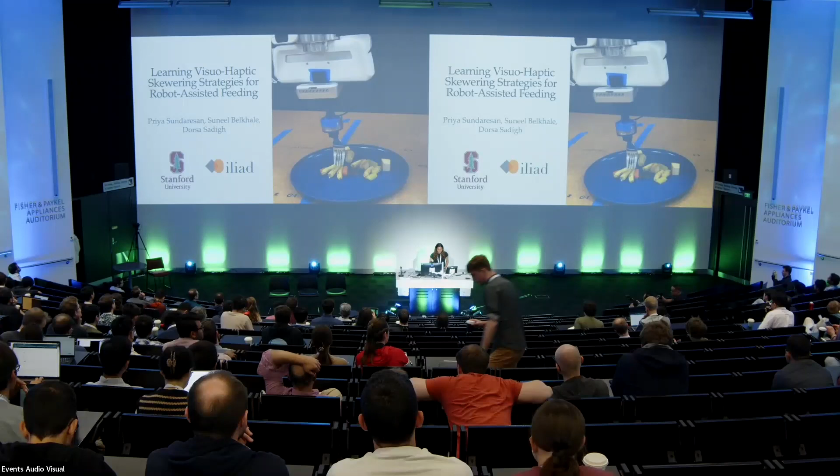Today I'm going to be presenting our work on learning manipulation policies for robot-assisted feeding, in particular, learning skewering strategies from multimodal perception.

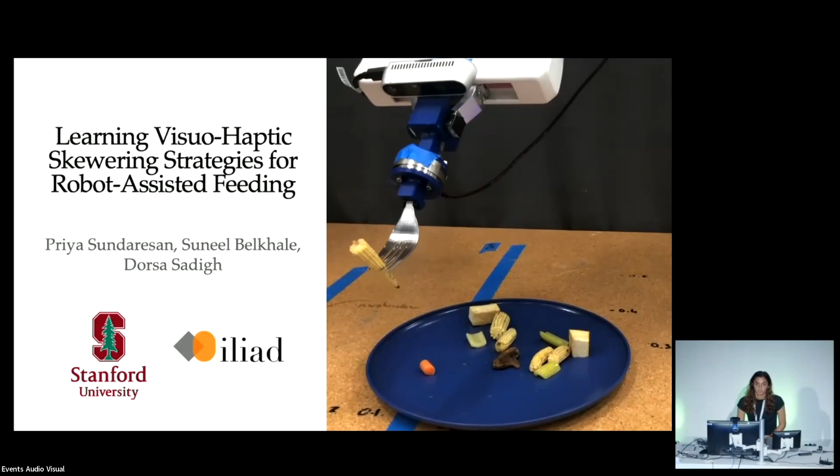Robot-assisted feeding has the potential to improve quality of life for millions of people, including those with upper mobility impairments who lack the ability to feed themselves, as well as a substantial portion of hospitalized elderly, nursing home, and stroke patients, as well as the caregivers who look after them. More broadly, anyone impacted by the substantial time and effort required in meal preparation and feeding, such as families with young children and elderly.

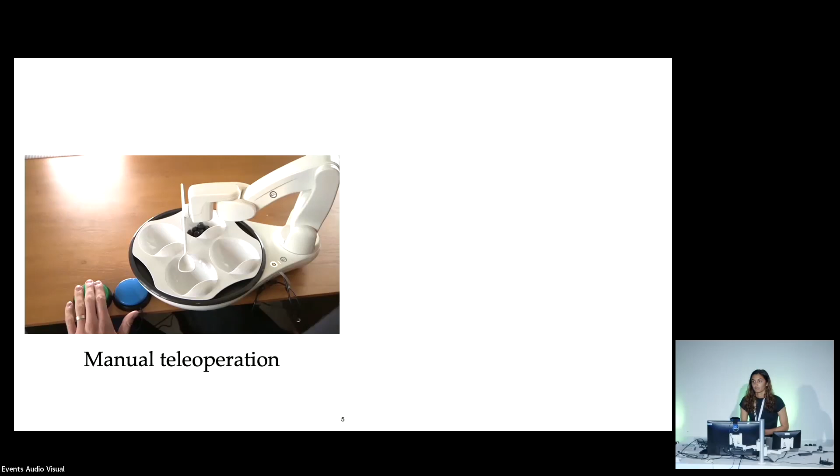There are a number of solutions on the market for automating meal assistance, but one drawback is that they often require the user to perform some degree of manual teleoperation when it comes to performing the low-level movements of picking up food items. Another limitation is that they require an operator to have pre-programmed trajectories for transfer to a user's mouth. So this leaves great potential for automation in the space of bite acquisition.

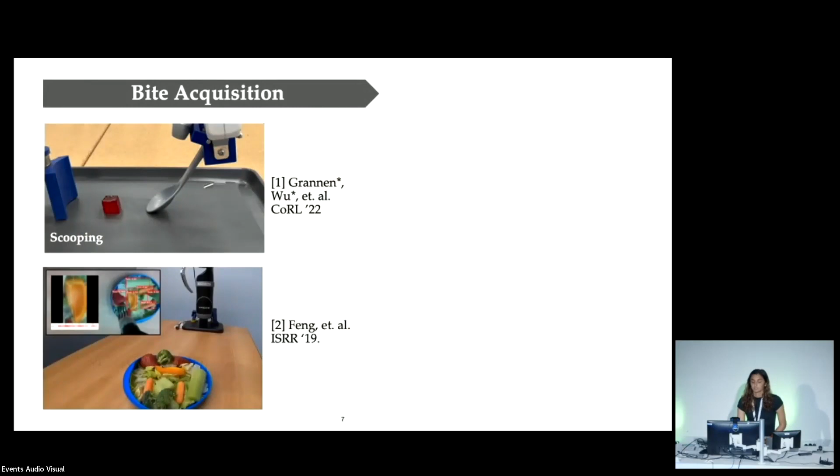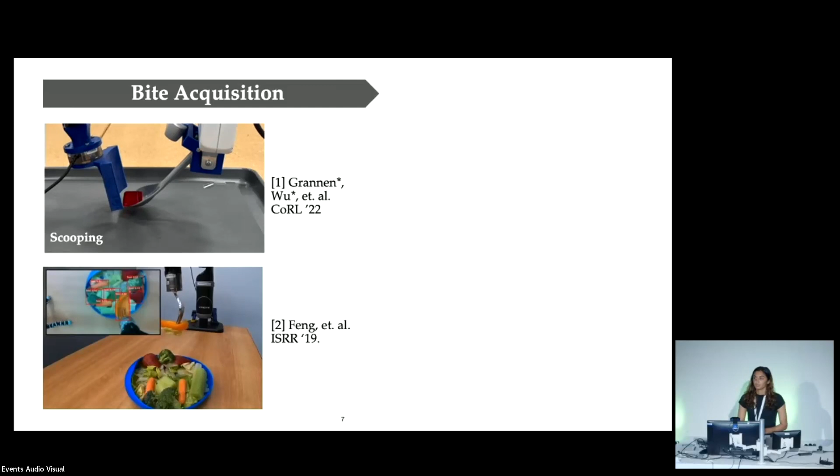You might have seen my lab mate Jen's work earlier at CoRL on learning bimanual scooping policies. A number of labs have also looked into automating skewering, which we build upon. The downstream goal of bite acquisition is eventually to do bite transfer, which is transferring a bite to a user's mouth in a way that's both comfortable and efficient.

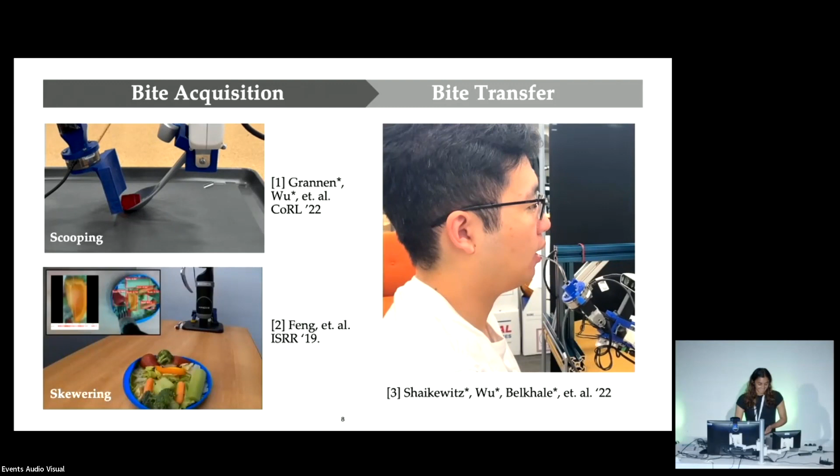The focus of this work will largely be on improving skewering strategies, as this still poses a number of challenges to robots today. So you might be wondering, what makes skewering difficult? This is a very challenging task, not just for robots, but even for humans, as you can see in this video of a baby trying to pick up mango slices with a fork.

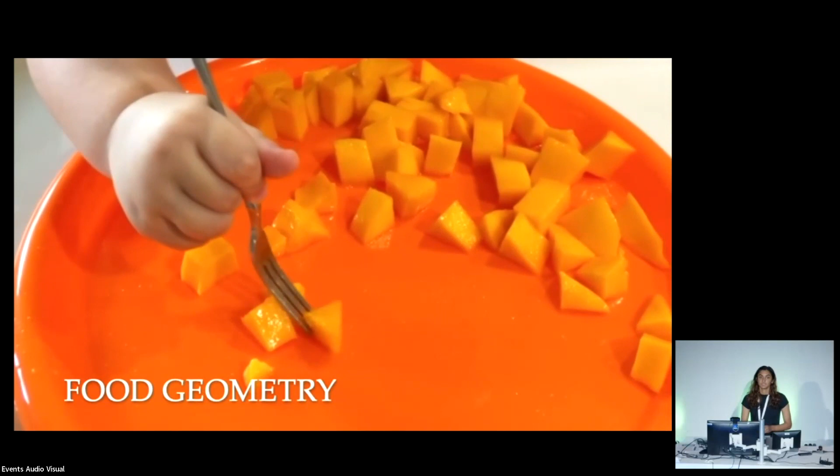More concretely, the first main challenge is that food comes in many different shapes, sizes, and scales, and we want our policy to be able to generalize across food geometries, because any slight misalignments of the fork tines with respect to the item pose can lead to slip failures, as you saw there.

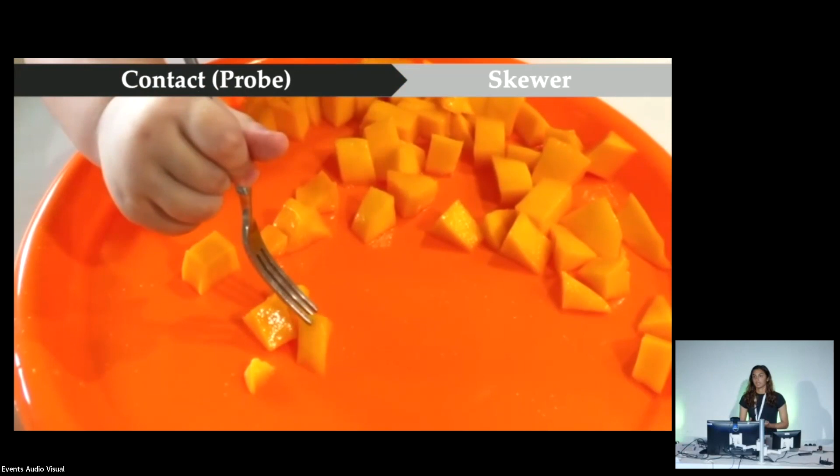We also want to avoid taking unnecessary attempts, so we want our policy to incorporate tool reactivity. As humans, something we do is when we play with our food, we can gauge important properties, like how ripe a mango slice is. But downstream skewering, given this information, is still very challenging.

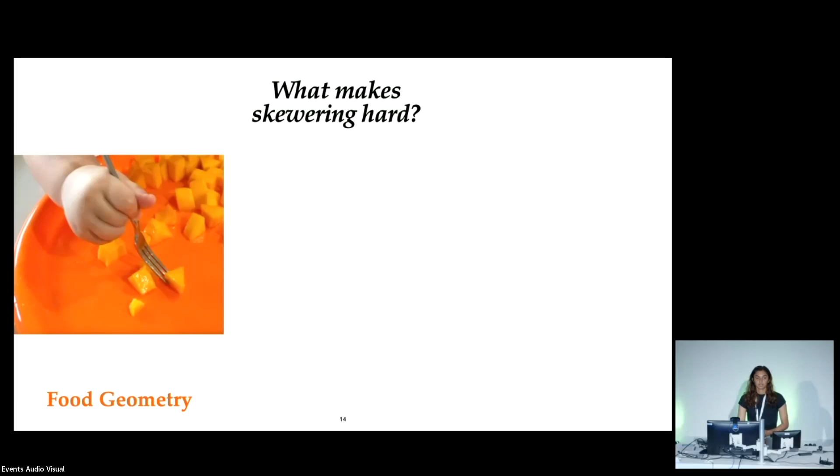Lastly, food is a highly deformable object, and we want our policy to take care when actually skewering so as to avoid the kind of smushing which you saw there. So in summary, the main challenges we're trying to address are coming up with a policy that generalizes across foods of different geometries, is also tool reactive, and is sensitive to the range of deformation behaviors that food can exhibit.

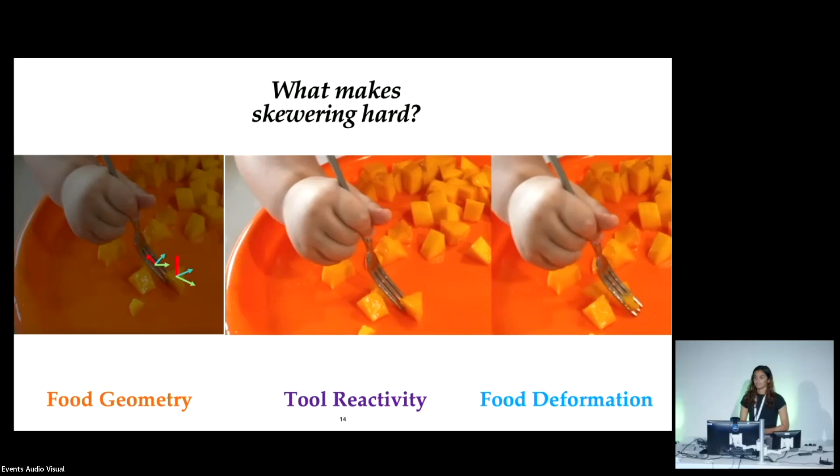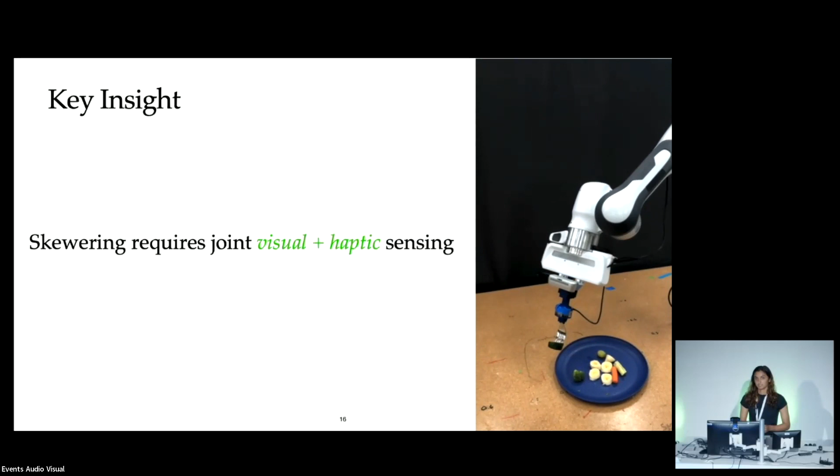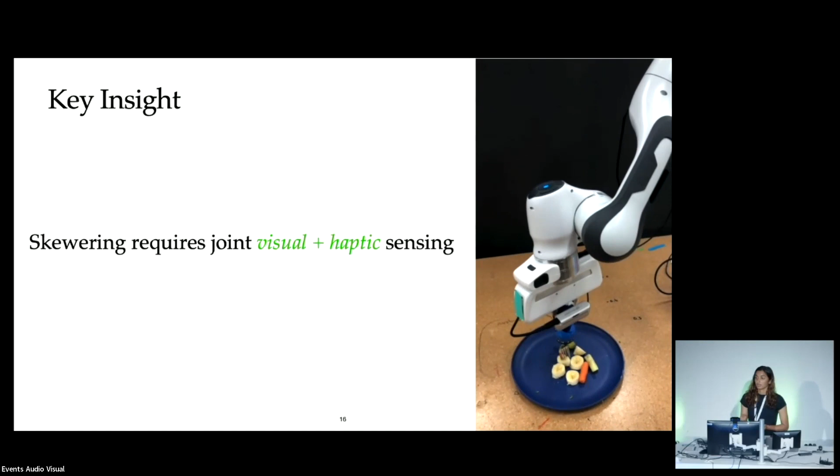Our key insight is that this task requires both joint visual and haptic sensing to enable reactive and zero-shot skewering. We achieve this with a novel probe-then-skewer approach, in which the multimodal feedback that we obtain upon just making contact with food items can inform the rest of the skewering trajectory on the fly.

So in this talk, I'm first going to formalize the skewering problem and then discuss our proposed approach, which we call haptic visual net, and finally demonstrate our system's performance on clearing various plates of food.

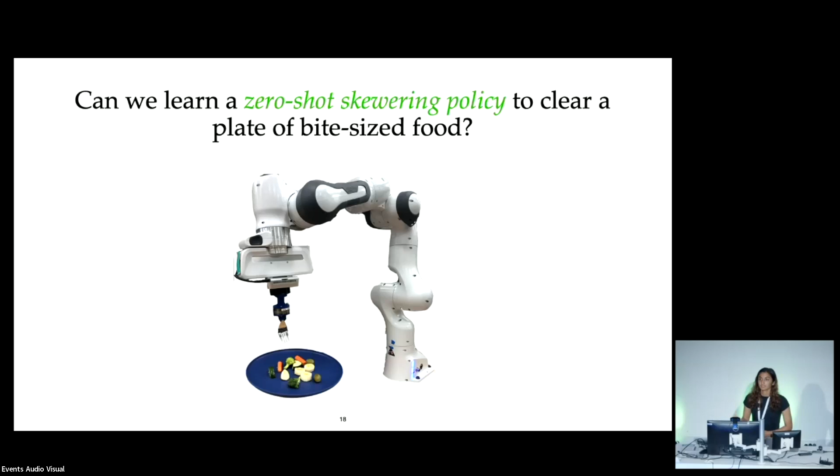We seek to learn a zero-shot skewering policy, enabling a robot with a fork-equipped end effector to be able to clear a plate of bite-sized food items.

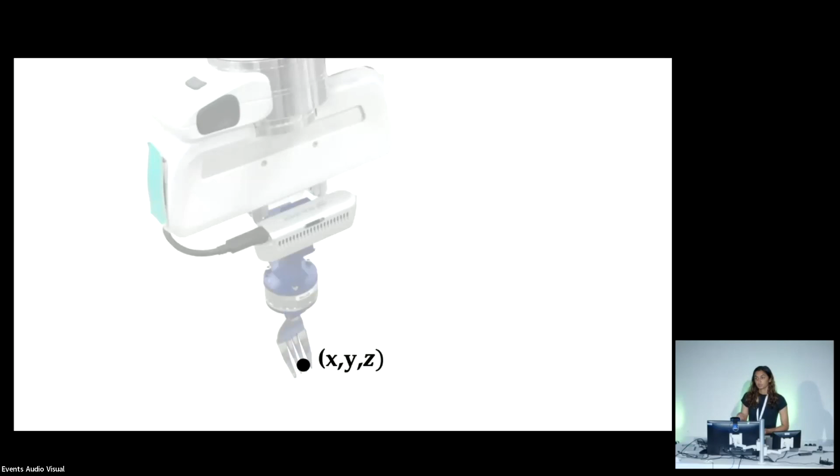For action space, we modulate the fork pitch for sensitivity to item deformation, as well as the fork roll for sensitivity to the item geometry. Within this action space, we can define a skewering action such that the fork starts at position XYZ, skewers downward an amount delta Z, while optionally tilting this amount delta beta. We'll see how we use this action space to instantiate skewering primitives later on.

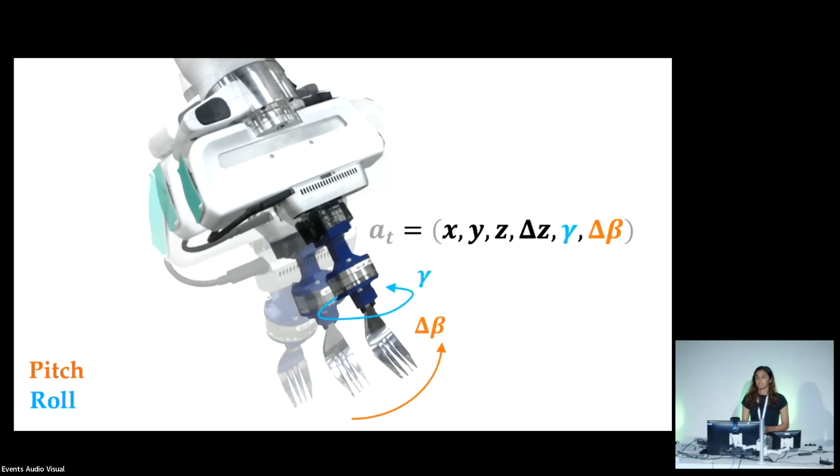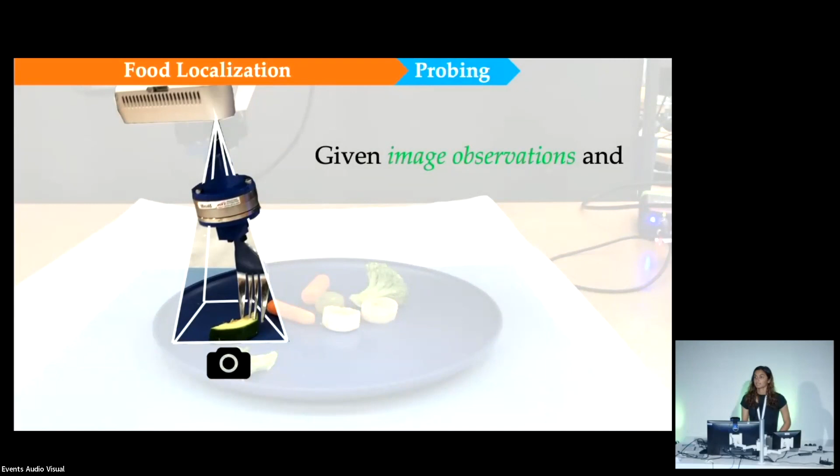Given this action space, what we do is we first probe food items, and given the post-contact image observations and haptic readings recorded over the first few milliseconds of contact, we want to learn a skewering policy pi, which can output a skewering action, as you can see here.

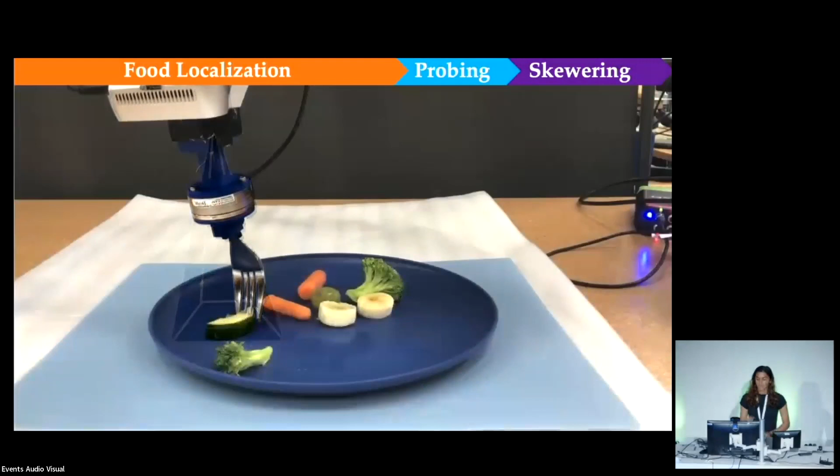Next, I'll be discussing how we actually learn such a policy with our approach, which is called haptic visual net.

Before going into the full method, I'm first just going to introduce the skewering primitives which we consider. On the left is the vertical skewering primitive, where the fork simply stabs an item in a straight and vertical motion. This is intended for very hard items like a broccoli stem, for example.

We also use an angled skewering primitive, where the fork gradually tilts while inserting into an item. This is to support soft and delicate things like a banana slice while lifting, to avoid any kind of slip.

With the multimodal feedback that we obtain upon probing, this serves as input to our haptic visual net, which aims to learn a multimodal food item representation encoding which skewering strategy is appropriate for the given food item. We first encode the force features separately using an LSTM, and the image observations using a visual encoder. Finally, the concatenated cross-modality embeddings from both vision and haptics serve as input to a final layer.

This layer classifies which primitive to execute: either angled skewering in the case of soft food items like the banana slice, as you can see on the upper right, or vertical skewering for hard items like broccoli.

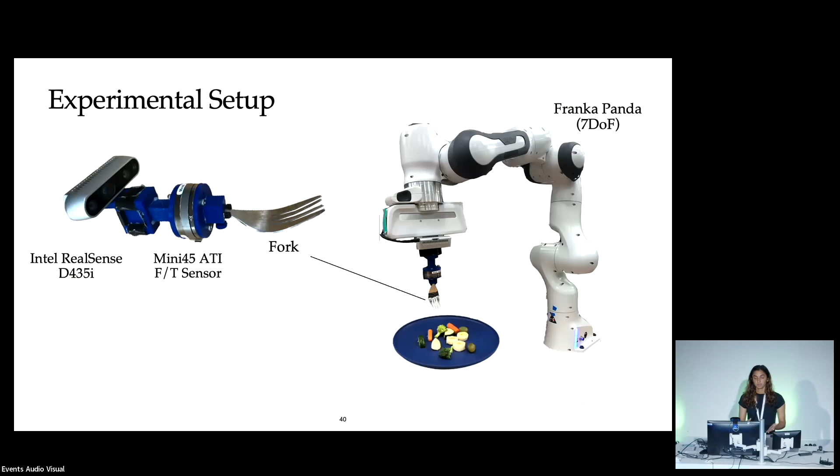We evaluate with a Franka robot equipped with a custom end effector mount consisting of a camera, a force torque sensor, and also a fork. We evaluate on both seen and unseen plates of varying levels of acquisition difficulty.

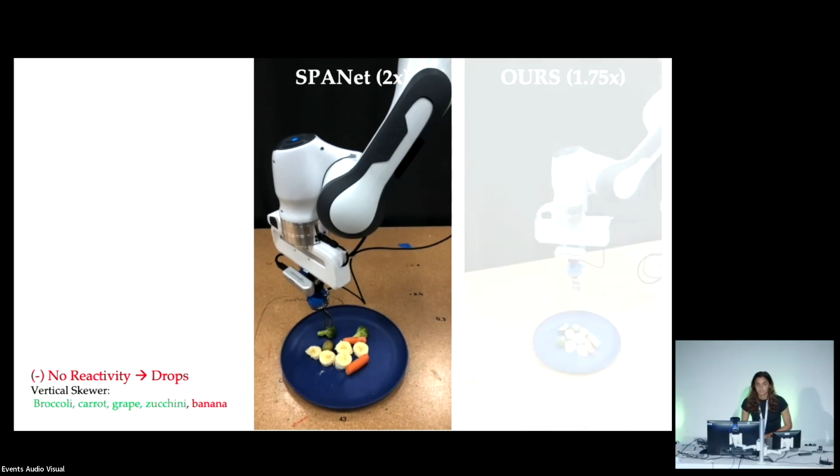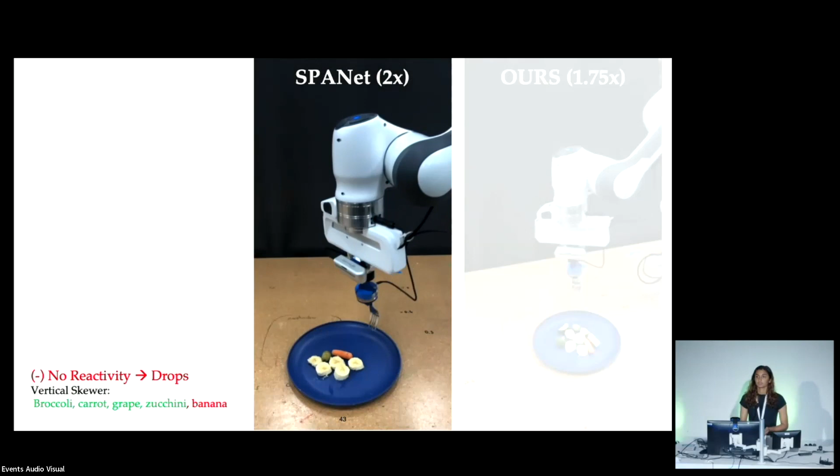Let's first take a look at this plate of fruits and vegetables. On the left is a video of a baseline called SPANet, from prior work, which is a visual-only baseline that does not use probing. As you can see, it tends to favor these vertical strategies overall, and while that's appropriate for the broccoli, it quickly leads to consecutive failures on banana slices as it's not able to adapt via probing.

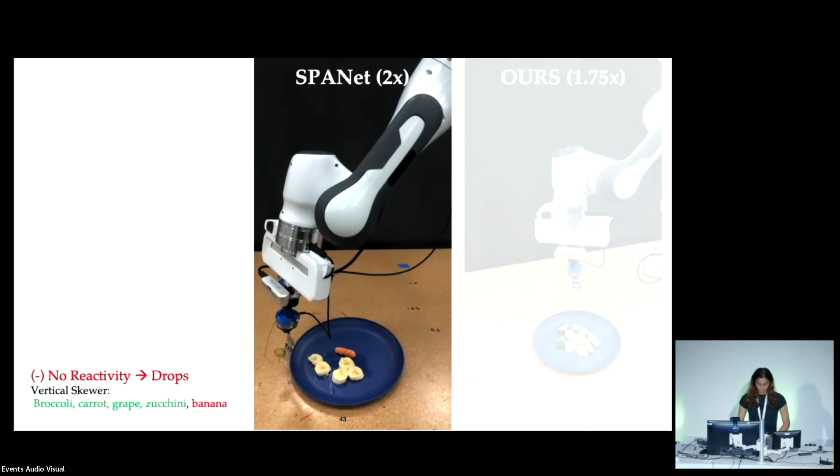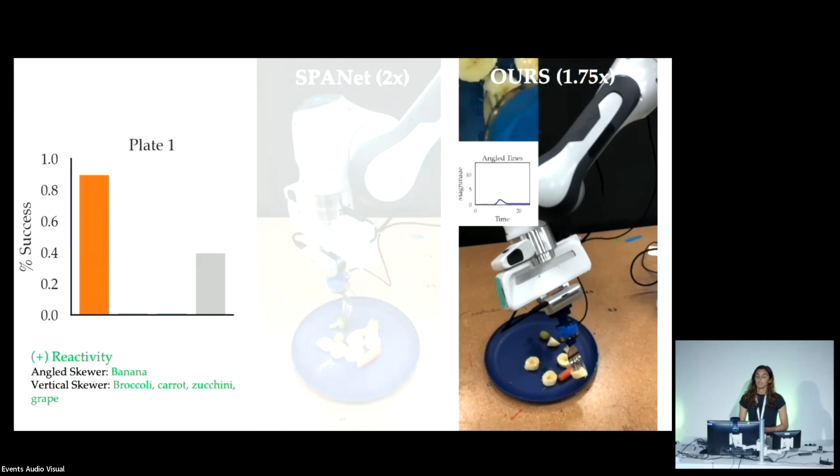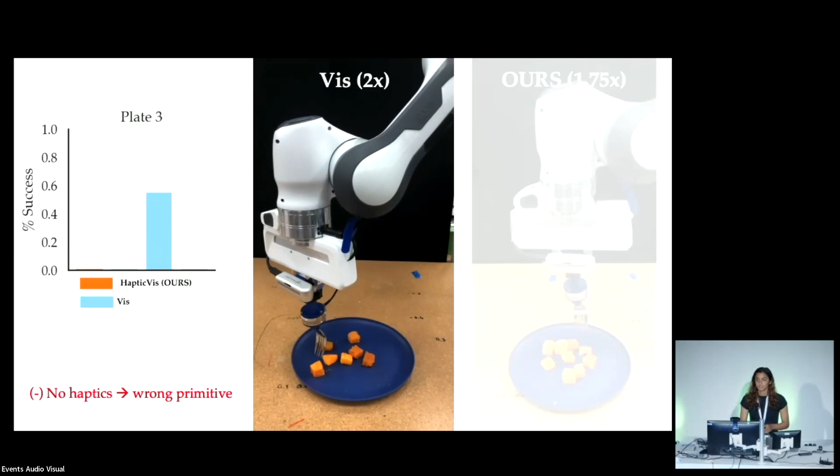This is a tricky plate because it's actually butternut squash with various degrees of cookedness, ranging from raw to half-boiled to fully boiled. On the left is a video of a visual-only baseline with no access to haptic info, and you can see that it's easily fooled by the different types of butternut squash because they are visually similar but texturally dissimilar.

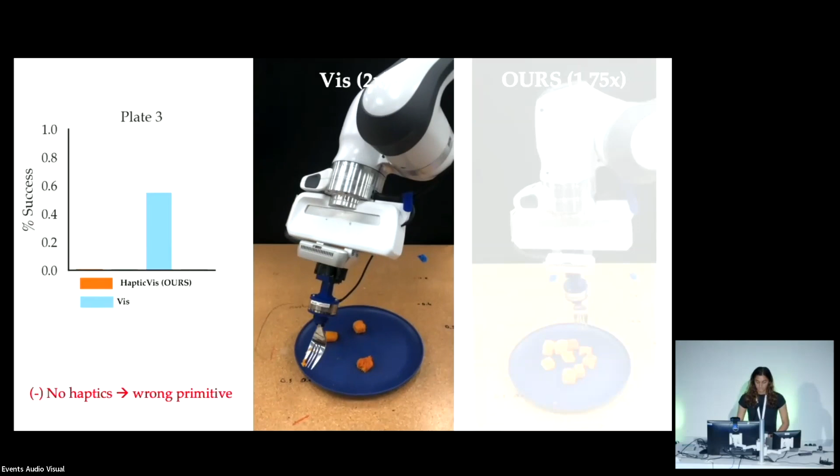Whereas our approach, by exploiting both vision and haptics, is able to infer that for the raw butternut squash, vertical skewering is appropriate, and with the more boiled variations, the angled skewering approach is appropriate, leading to far less drops and breakage.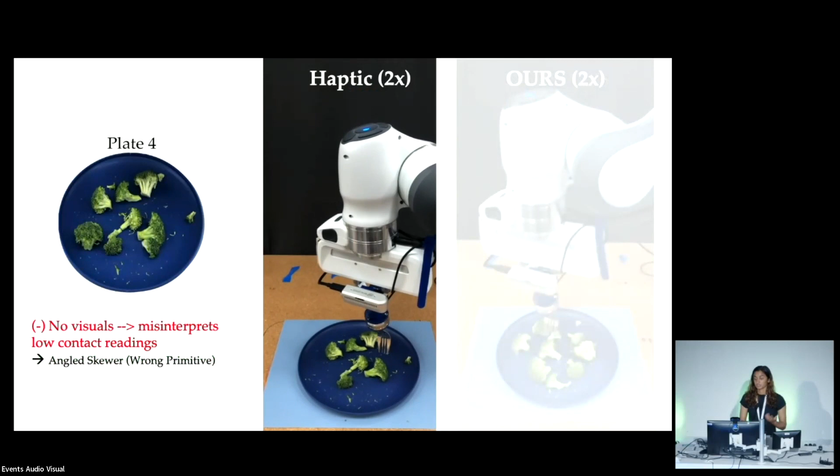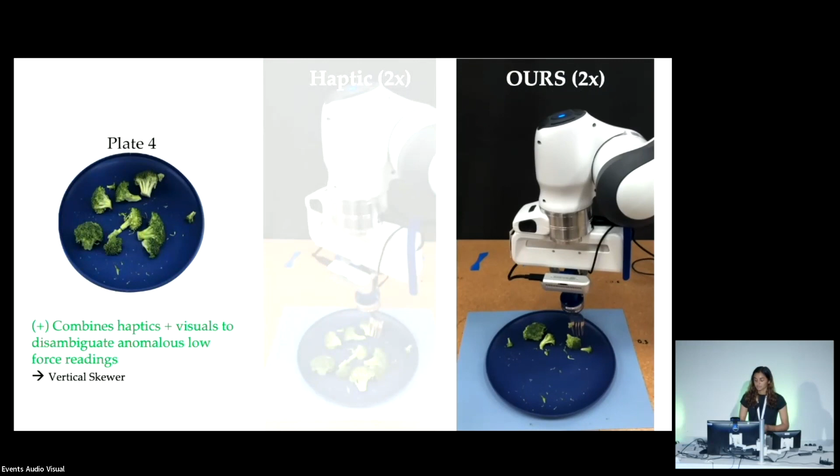We also consider a plate of only broccoli, and on the left is a haptic-only baseline with no visual information. Broccoli is a highly anomalous food item because just by touching it, this incurs low haptic readings, so a haptic-only baseline can easily be tricked into thinking that angled skewering is favorable. Whereas with our approach, it's able to use both visual and haptic sensing to recognize that this is a very fibrous food item requiring the vertical skewering strategy.

But despite these failures, we see that with haptic visual net, we're able to reduce the occurrence and also the severity of a lot of these failure modes.

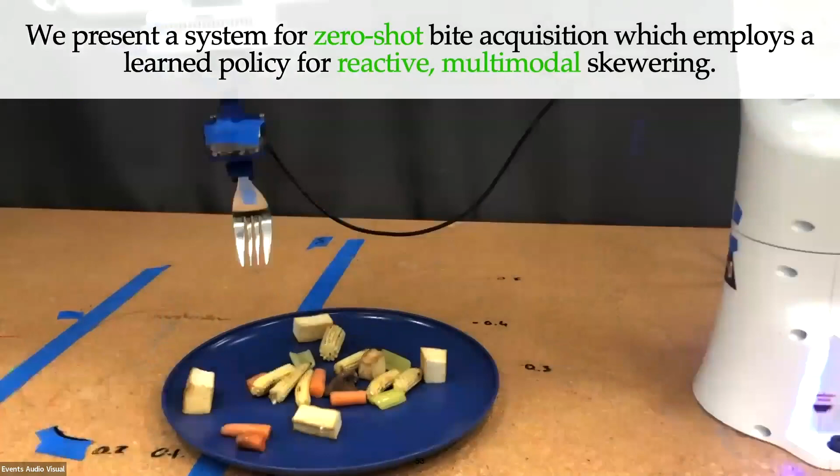So in summary, we present this system for zero-shot bite acquisition, which employs a learned policy for reactive and multimodal skewering. In the future, we're really excited about extending to much longer horizon and more dexterous acquisition strategies, such as being able to pick up noodles, and hopefully being able to combine a system for both acquisition and transfer in one. So with that, thank you so much for your attention.

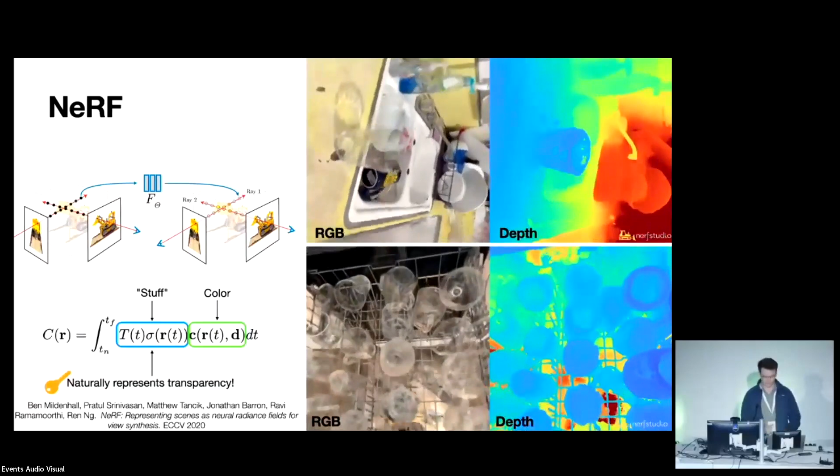And so you can get quite impressive reconstructions of complicated transparent scenes like my sink here or this dishwasher.

In our prior work, we found that raw depth outputs from NeRF could produce viable grasps using off-the-shelf planners like DexNet. However, this was far from practical because the data sets were hand collected and training NeRF took on the order of hours.

So in this work, the goal is to really make this practical and carry out sequential grasping. Given a cluttered scene of transparent objects, we want to grasp and remove them as quickly and safely as possible. To do this, we have a bimanual Yumi robot with a camera on the left hand and a pair of parallel jaw grippers on the right. Here's an example of the countertop environment that we're using.

In the past year since NeRF came out, there's been a flurry of research activity speeding it up with new positional encodings, from learnable hash grids to sparse matrix decompositions to dense voxel representations. This really enables rapid usage of NeRF in robotics, and so we build upon instant NGP here.

In the traditional NeRF setting, you have a data set of images, you compute your SFM or SLAM algorithm to gather poses, and then you train NeRF to convergence and render the scene like Yoshi doing his CoRL overleaf paper. The problem with this is that it's incompatible with robot usage because the image set is fixed per scene, and typically training NeRF is quite slow. Even with these speedups, it can take on the order of a minute.

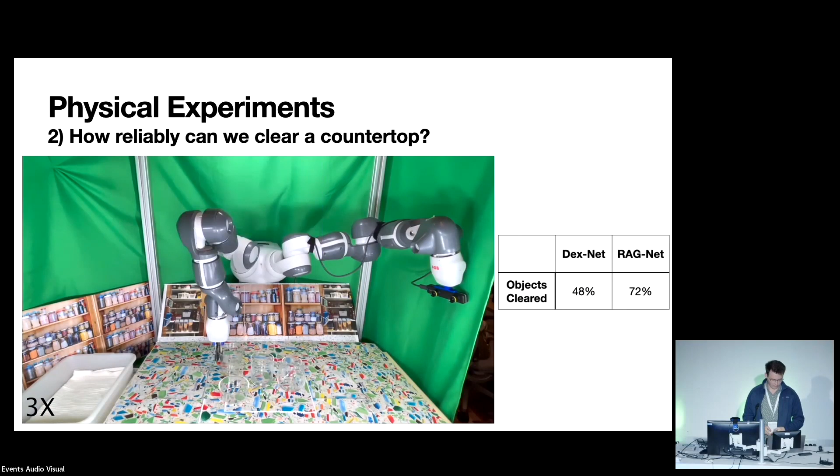Overall, DexNet can clear around 50% of objects, while RAG-Net can clear about 72%. We also tried discarding the nerf weights versus updating the nerf weights, and found that it doesn't result in much change in performance, while resulting in around a 60% improvement in speed.

This paper has no dirty laundry, and that's because we have dirty dishes instead. Some notable weaknesses are that because of the fattened objects, sometimes grasps can miss, or it struggles with very fine details on objects. In addition, even though it's really good at removing geometry, it suffers at adding or moving objects in the scene. And of course, it's not industrial speed, but more on a household scale, on the order of tens of seconds.

There are some interesting future directions. For example, pre-training nerf in a sort of meta-learning sense to get more robustness to changing scenes, using the 3D geometry more holistically for 6-DOF grasping, using the nerf gradients to get motion plan trajectories for the gripper, as well as embedding 3D semantics. So to sum up, we present a practical nerf grasping pipeline for transparent objects that uses nerf as an updatable scene representation.

Nerf as an updatable scene representation. Thanks for your attention, and happy to talk to you at my poster and accept any questions.

Hey Justin, thank you for the great talk. So one question I had was, we see that kind of rainbow colored tablecloth there. I wonder what you think in the future, is there a reliance on that, or could you do a monochrome one or something? And if not, what kind of directions in future work would you take? Thank you, that's an interesting question.

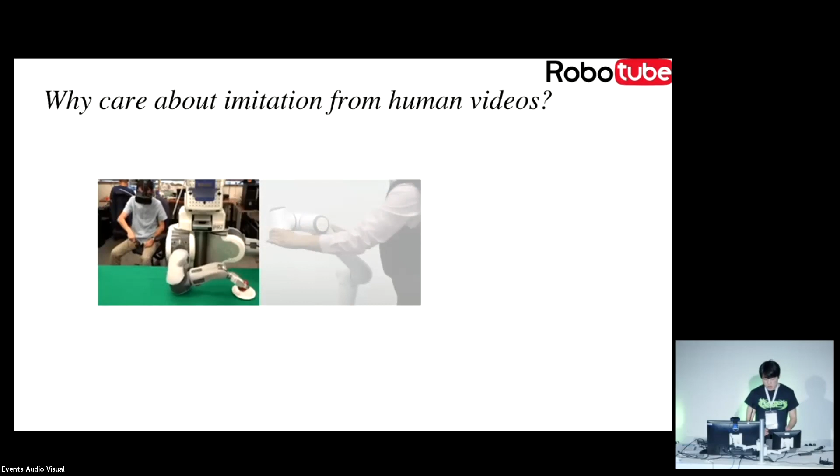Today we're going to pay more attention to imitation from human videos. The motivation here is that robot demonstration is actually very hard to collect and extend to a larger scale, even though we have many great platforms. The big picture idea of learning from videos is that we hope one day we can leverage massive sources online, like YouTube videos - we search how to cook a steak maybe, and try to teach the robot how to do imitation learning tasks.

So where are we now? Recently there have been great works - let's say Time Contrastive Network, they collect their own dataset, and also Concept2Robot leverage some data set to learn a generalizable reward function for downstream manipulation tasks. And at CoRL this year, we also have VideoDex, which tries to use the Epic Kitchen dataset to learn useful prior knowledge for downstream manipulation tasks. Our argument here is that a standard dataset, a standard benchmark platform, is still a missing part in our area.

That's why we took 1.5 years to build the RoboTube platform. Here are some numbers of the video dataset we have. We set up 5 task families and 50 tasks in total. We have 60 household objects ranging from rigid objects, articulated objects, and deformable objects. We asked 9 demonstrators to go to real kitchens and real offices to collect more than 5,000 video demonstrations under more than 30 real environments.

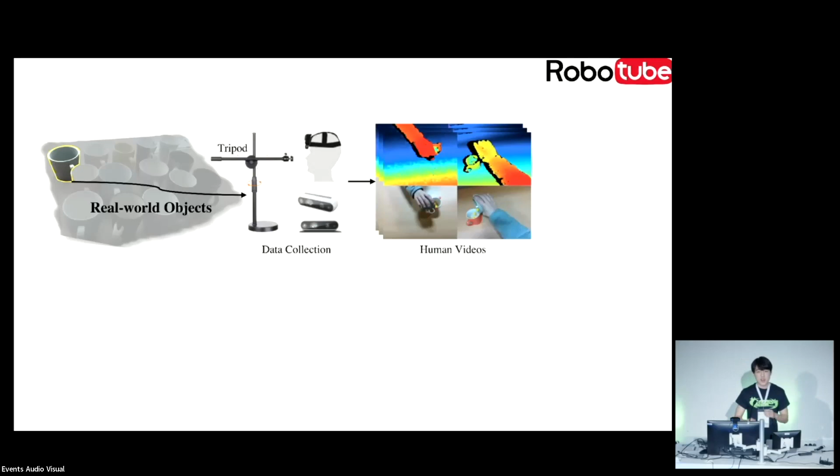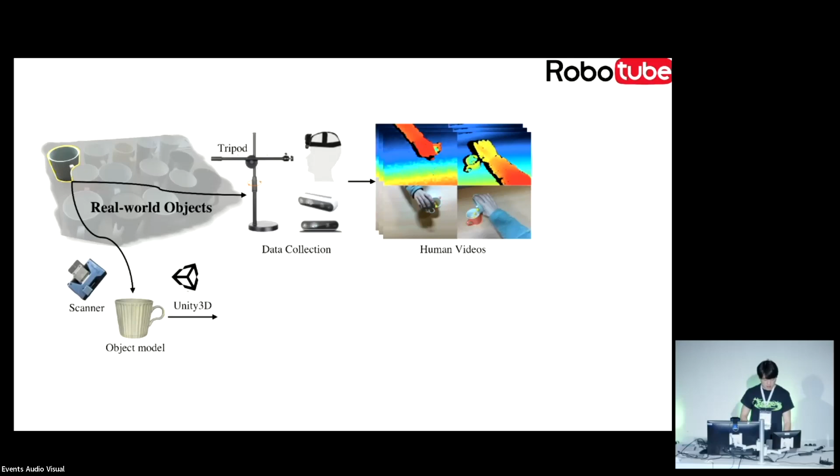But if we want to benchmark and test the model learned from videos, the video dataset alone is not enough. That's why we took more effort to build the so-called digital twin environment using 3D scanning technology, so that the model learned from RoboTube videos can be tested, benchmarked, and reproduced in our simulated twin environments.

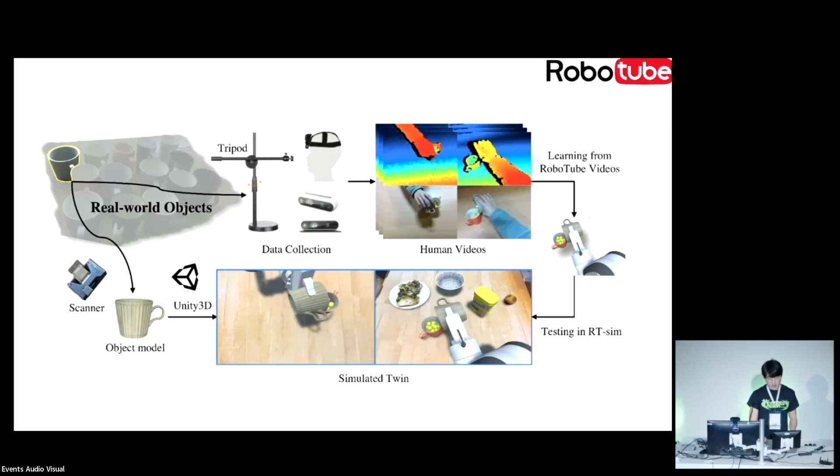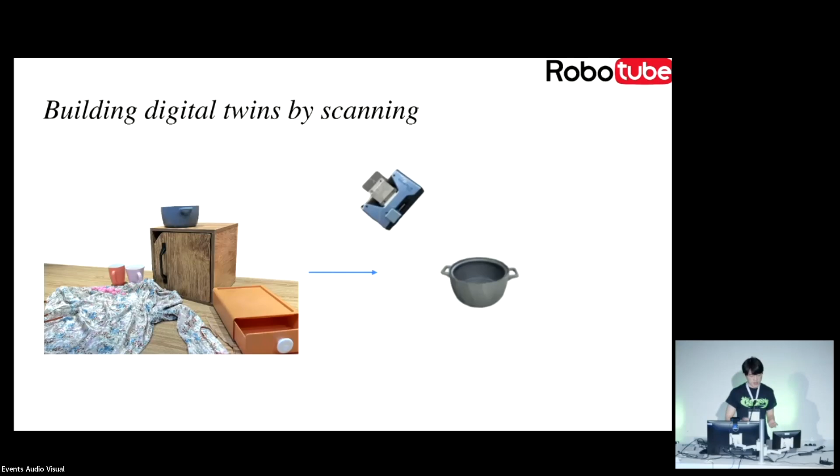And how we build the digital twins, we use 3D scanning technology to obtain the object model of every single object shown in the video to create a digital twin in the simulation environment.

And here we collect a suite of objects data set. We split them into training set and testing set. So we hope that, for example, reward model learning from those training sets can test the generalization to unseen objects and unseen environments. And it's also notable that those visually realistic, reusable assets can be transferred to other platforms as well.

And here I'm gonna show a quick demonstration of the simulation environment we built using Unity 3D. We take special care to bridge the visual gap between the real world and the simulation world. And we want to create a very realistic and diverse environment so that the model we learned from, let's say, real world video data set can be correctly tested in our simulation benchmark. And we can quickly verify our new algorithms before moving to real experiment setting.

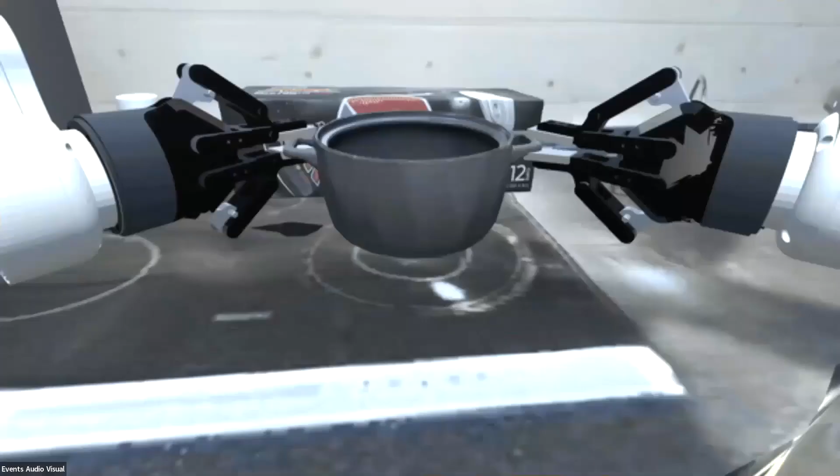And we also do some comprehensive experiments to benchmark existing methods of self-supervised reward learning. And we also tested some of the generalization to real-world experiments. So the first part is benchmarking reward learning methods.

An overview of self-supervised reward learning is that, let's say, given a bunch of videos showing you how to open or close a drawer, we train a reward model. We can create a neural reward function using some passive data offline pre-training. And once we have this learned reward model, we can apply reinforcement learning.

Let's say we have an agent interacting with the environment. And at every time step, we have a feedback of the visual observation, let's say maybe RGB imaging. And we take this as the input of the neural reward function, and it can give you a reward. So you can use reinforcement learning to try to mimic the behavior of the expert.

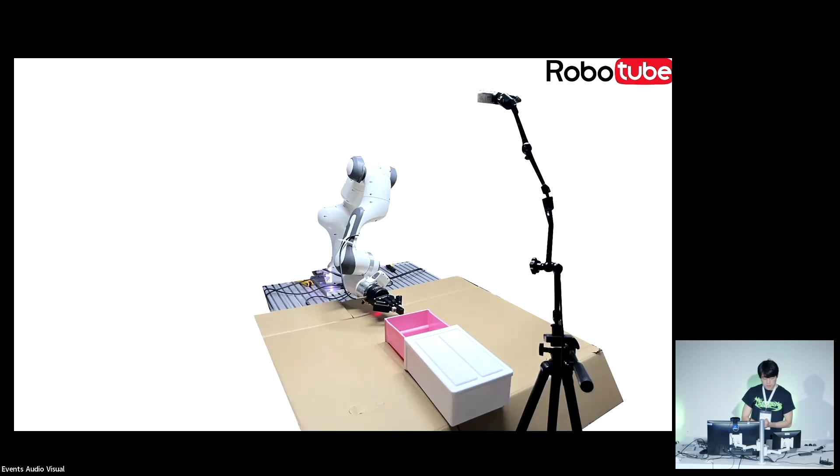Let's say we teleoperate the robot to collect successful videos and we record the videos as the testing data. For example, we have a Franka closing a drawer, and we want to train the reward model from those training sets and test the zero-shot generalization from human domain to robot domain and see if it can bridge the morphology gap.

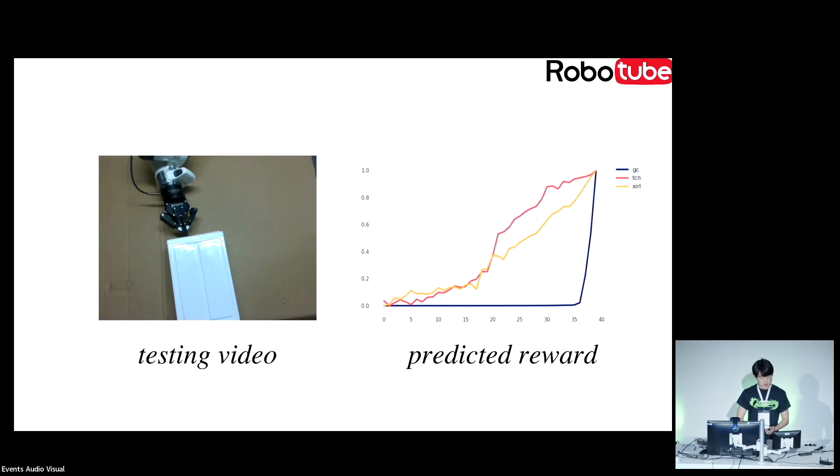And surprisingly, we found that if you have enough diverse objects, it can zero-shot generalize from human morphology to robot morphology. And on the right is the predicted reward curve using the pre-trained reward model, tested on a successful video trajectory.

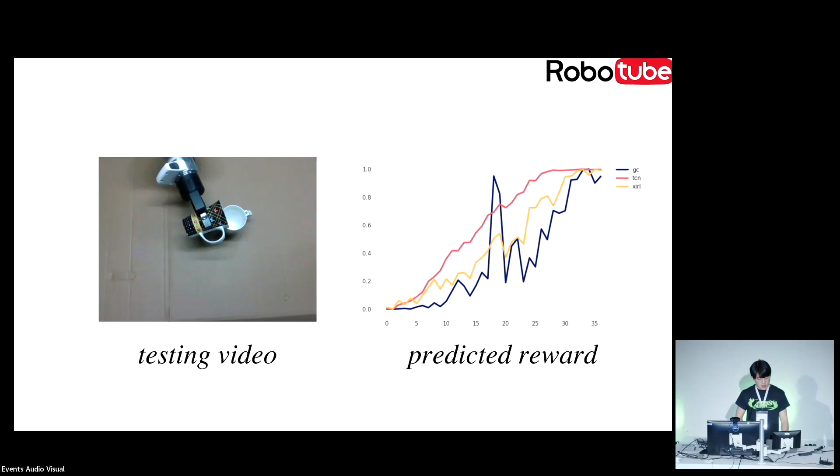And we also have other experiments like water pouring and also manual lifting tasks, and also how to open the cabinet. And also we include some deformable object tasks like clothes folding.

Okay, and some of the limitations of version 1 of RoboTube is that we take special care of the visually realistic simulation because we focus on how to do visual imitation learning, but we also try to build a physically realistic simulation. But currently there's still a gap between sim to real.

We want to pay more attention to correctly modeling the dynamics of the object in the future and close the real-to-sim-to-real loop. And the second thing is, in following work, it might be interesting how we can quickly extend the scale and the diversity, both for the video data set and the simulation environment.

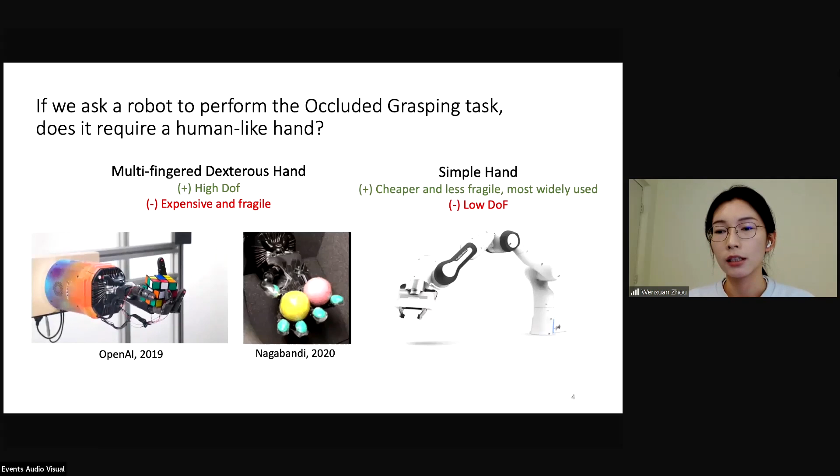Previous work has proposed the concept of extrinsic dexterity, which is to solve complex tasks with a simple gripper by utilizing the external environment. This is different from the common practice of considering the robot and the object in isolation. It focuses on a holistic view of the interactions among the object, the robot, and the external environment. In our work, we want to use this idea to solve the occluded grasping task with a simple gripper.

Previous work on similar tasks usually relies on handcrafted primitives, assumptions on contacts, special gripper design, or multiple arms. In this work, we want to demonstrate emergent extrinsic dexterity behavior with reinforcement learning without these limitations.

We will introduce the proposed system for occluded grasping from three aspects: RL problem design, dealing with a set of grasp poses, and enabling zero-shot sim-to-real transfer.

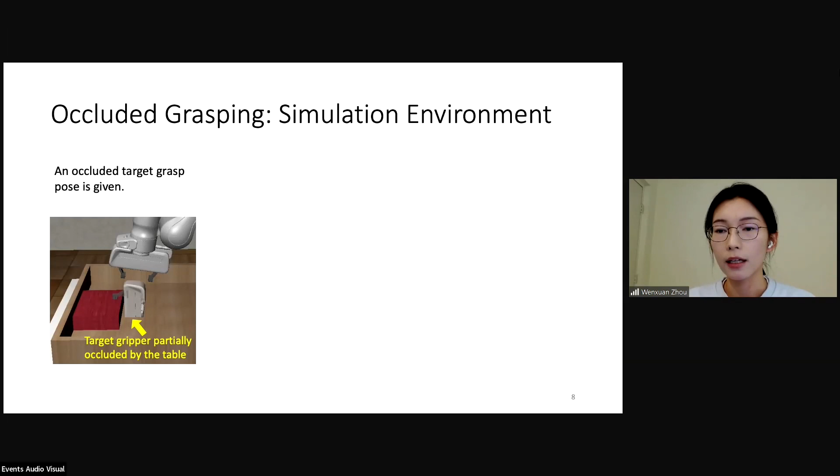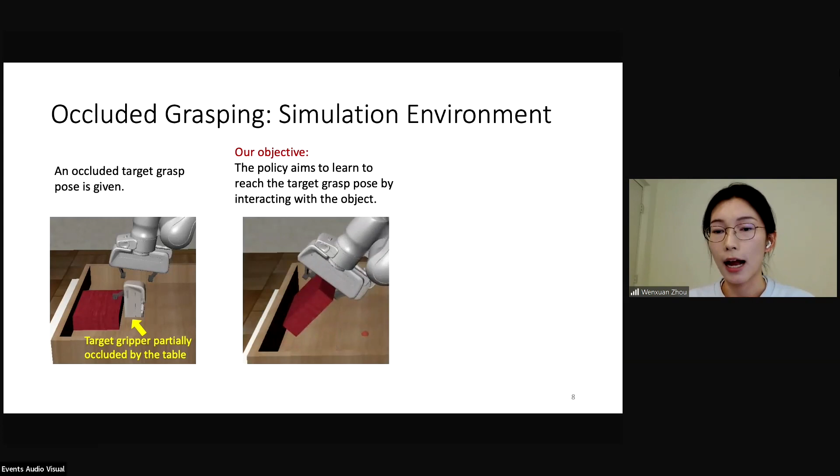We build a simulation environment for this task. For each episode, a target grasp pose is given, which is partially occluded by the table. During the episode, the policy aims to learn to reach the target grasp pose by interacting with the object. Placing the object inside the bin can enable the possibility of using extrinsic dexterity.

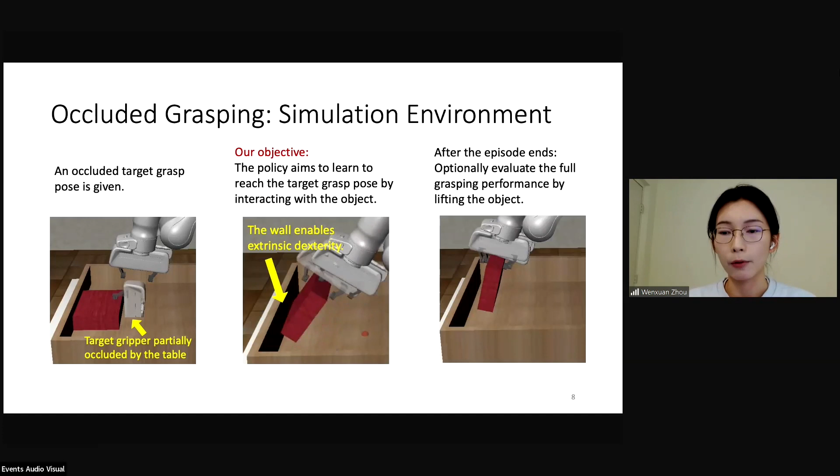Although our objective is mainly about reaching the pose of the given target grasp, we can optionally evaluate the full grasping performance by closing the gripper and trying to lift the object at the end of the episode.

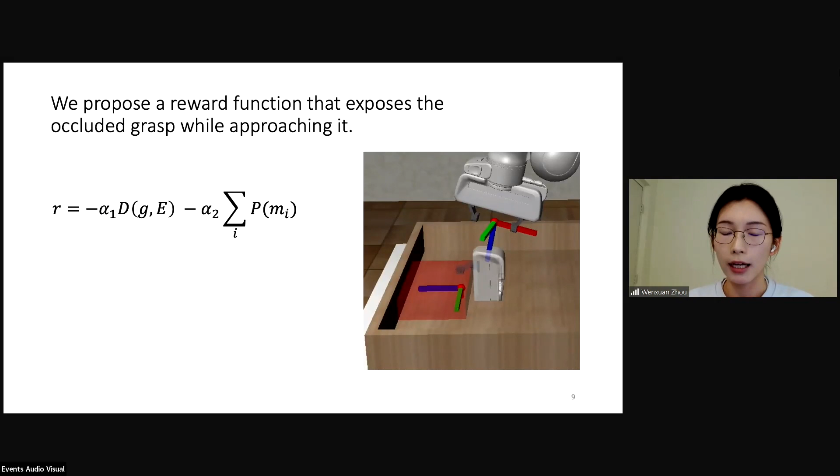We propose a reward function that exposes the occluded grasp while approaching it. It only has two terms. The first term is about grasp alignment, which calculates the pose difference between the target grasp and the current end effector pose. The second term is the occlusion penalty, which penalizes the occluded portion of the target gripper. This is calculated by setting several marker points on the target gripper and checking if these marker points are in collision with the table. Note that our reward function does not have any handcrafted separation of pre-grasp and grasping stages, and we do not have any term for extrinsic dexterity.

The action space of the task is end effector delta movement, and the observation space includes target grasp pose, the end effector pose, and the object pose. For the real robot experiments, we're using ICP to estimate the pose of the object.

For our algorithm, we use soft actor critic. Since the target grasp pose can be considered as a goal, we can formulate our problem as a goal-conditioned reinforcement learning problem and use hindsight experience replay in addition to soft actor critic.

In some cases, we might have more than one feasible grasp for an object, so we also consider how to train and test with a set of grasps. During training, we introduce a multi-grasp curriculum, which gradually expands the range of grasp poses. During test time, since we are using an off-policy algorithm, the agent can choose the best grasp that leads to the highest Q value.

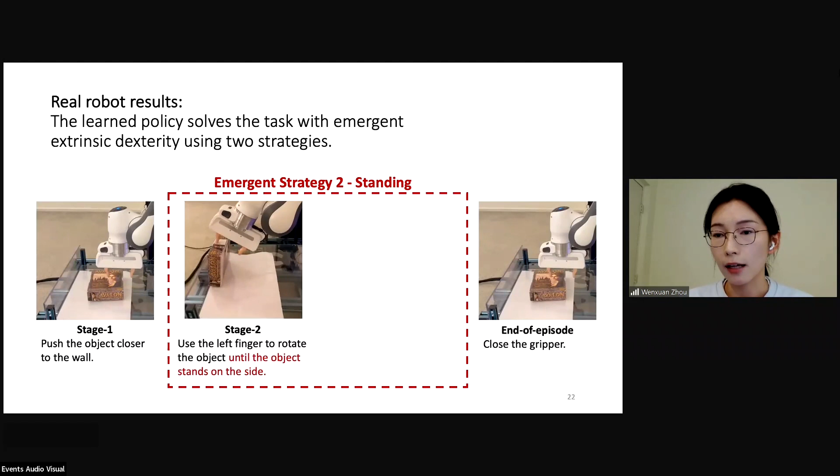At the end of the episode, we command the robot to close the gripper and try to lift the object to measure success. Interestingly, in some other cases, the policy shows a second emergent strategy: it will try to rotate the object until it stands on its side, and then the gripper can try to move close to the target grasp.

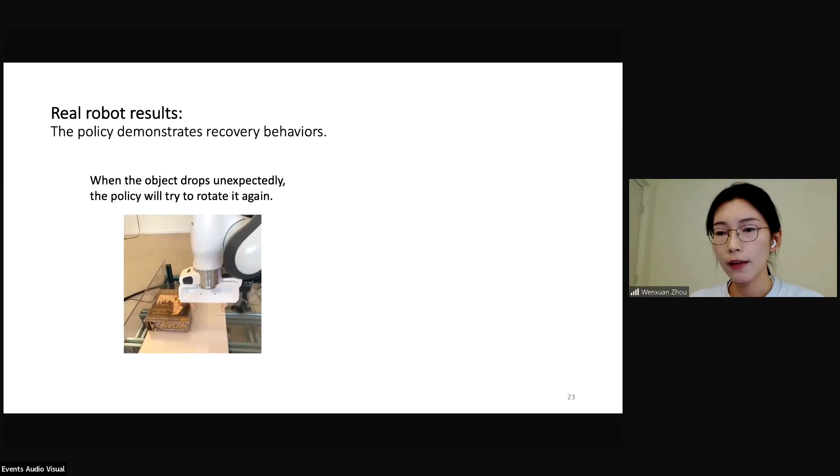We also found that the policy demonstrates recovery behavior. For example, when the object drops unexpectedly, the policy will try to rotate it again. In this example, when the object bumps on the right finger, the policy switches from the dropping strategy to the standing strategy. We evaluate the policy across objects with various surface friction, density, and shapes.

Most of the objects are out of distribution. Although the policy is only trained in simulation with box-shaped objects, it is able to generalize to different shapes to some extent, as long as the object pose distribution remains similar.

Quantitatively, the policy can generalize across different objects with a 78% success rate when trained with ADR, 45% higher than without ADR. In simulation, we show different design choices are important for this task.

For example, without the wall, the policy cannot find a way to solve this task. And without the occlusion penalty, the policy often gets stuck at a local optimum of trying to get close to the grasp without moving the object.

When dealing with a set of grasps, the policy trained with curriculum shows significantly different behavior for different ranges of grasps. For example, when the curriculum starts from a grasp pose from the side, the robot may use another side of the wall to reach the grasp.

For more quantitative results on baselines and ablation studies, please check out our paper.

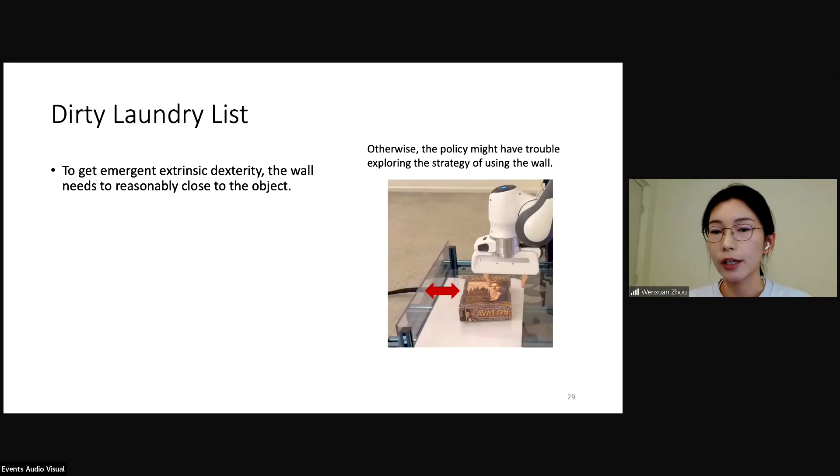Now let's discuss the dirty laundry list of our work. First, to get emergent extrinsic dexterity, the wall needs to be reasonably close to the object. Otherwise, the policy might have trouble exploring the strategy of using the wall.

Second, our policy is only trained with box-shaped objects, with object poses without any shape information. The assumption we made here is that the non-box test objects have similar dynamics as box-shaped objects. To improve generalization across more shapes, we may consider training with more shapes in simulation, or use a better representation of shapes such as point clouds or key points.

The third point is that sim-to-real is challenging. We include all the details for sim-to-real in the appendix. However, there's still a lot of room for improvement. In the future, we may consider more extensive domain randomization, system identification for robot parameters, or fine-tuning with real-world data.

For more discussion and videos on the failure cases, please check out our website.

In summary, we present a system for the occluded grasping task that shows emergent extrinsic dexterity with a simple gripper. It demonstrates contact-rich and dynamic behavior on a real robot that can generalize across various objects.

Here are the takeaways of this work. First, simple grippers are underrated when combined with a skillful policy. Second, robots should exploit extrinsic dexterity for more skillful manipulation. And lastly, reinforcement learning can generate policies with emergent extrinsic dexterity that transfers to real robots. When these aspects are combined, we can unlock the potential of manipulation.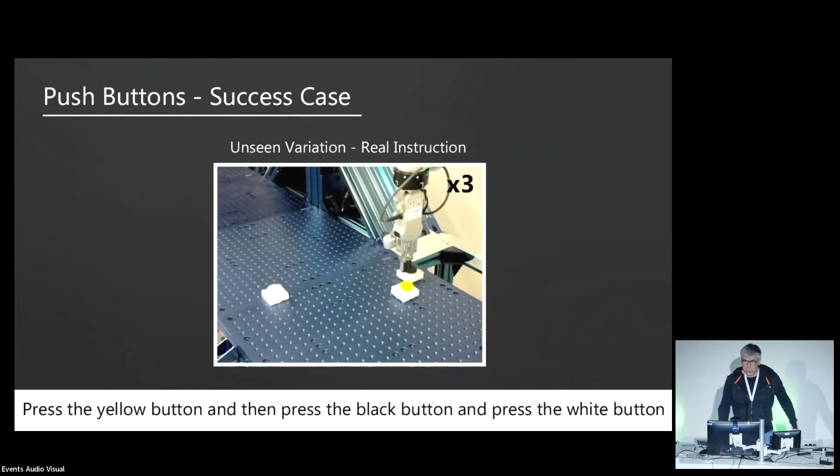This test is when going from synthetic to real: we collected language instructions from humans. We gave them pictures of, say, buttons which should be pressed, and they generated language. Then we put this language straight into the agent, and it's supposed to finish the task. We also tried it on the real robot. We just took the simulator-trained policy, and with a bit of fine-tuning, directly transferred it to the real robot. That was done by Ricardo, who is here in the audience.

That's about it. In summary, transformers are a good way to combine information for robotics, especially because you have very different types of information, like proprioceptive or haptic, which we didn't do. Our transformer for this particular task shows good results, and also shows promise to perform unseen tasks suggested by language.

Now limitations. For some reason, when we tried to learn one policy across 74 tasks, it didn't work that great. We believe that might be because of the capacity of the network. Long horizon tasks are still complicated because of exposure bias, since we still do behavior cloning. The memory would become complicated because we are modeling it explicitly. We also see some drop in performance for natural language written by humans. I guess this could be addressed by learning the models on real human instructions.